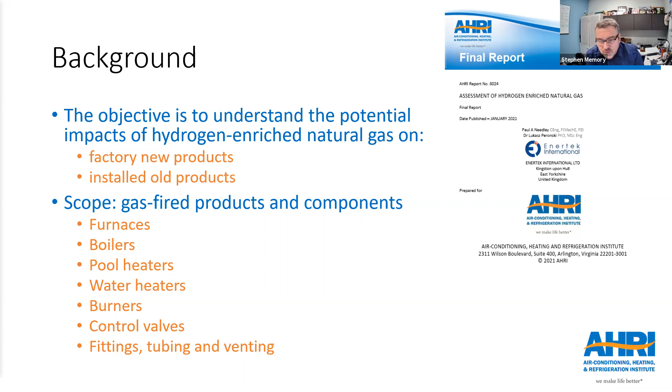I'm delighted to have this opportunity to speak about the work we've been privileged to undertake on behalf of AHRI, although in an ideal world, I'd rather have done this in person instead of via a screen. Once the COVID pandemic subsides, climate change and the need to decarbonise is likely to be the next topic to dominate the news, and hydrogen is seen worldwide as the best way to decarbonise the gas supply, either by blending it with methane or even replacing methane in the longer term.

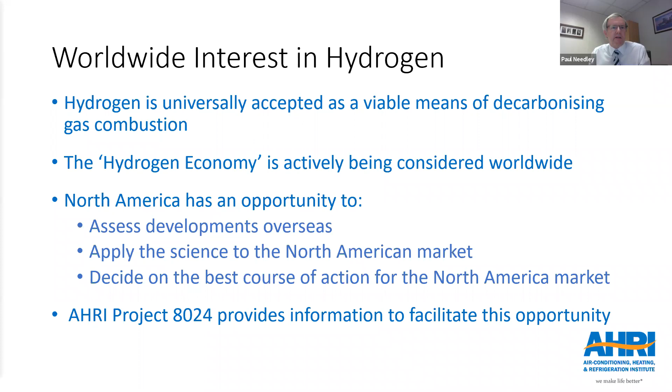Now, it's probably fair to say that Europe, and particularly the UK, is at the forefront of the drive to decarbonise, and consequently, perhaps for a change, North America can reflect upon what is happening elsewhere, take note, check the science, and apply the knowledge gained to get the best solution for the North American market. Hopefully, this project provides information to facilitate that opportunity. Next slide, please. Thank you.

So the rationale behind the project was to look at what information is currently available, to refer to the science, specifically combustion technology and thermodynamics, and apply this to typical American gas appliances so that we could identify and evaluate risks, then propose what, if any, action is required.

Thank you. Amid the news and hype about hydrogen worldwide, many of the projects underway are concerned with the production, storage and distribution of hydrogen. Whilst these are very important and essential if hydrogen is to become mainstream, we are concerned with its end use. Even then, there are questions over its best use. Should it be used for industrial applications, for power generation, or transport, rather than for heating or cooking? However, natural gas combustion produces CO2, and for the gas network to survive, it needs decarbonising, and hydrogen offers the best way to do this in volume, and of course, our project focuses on heating products.

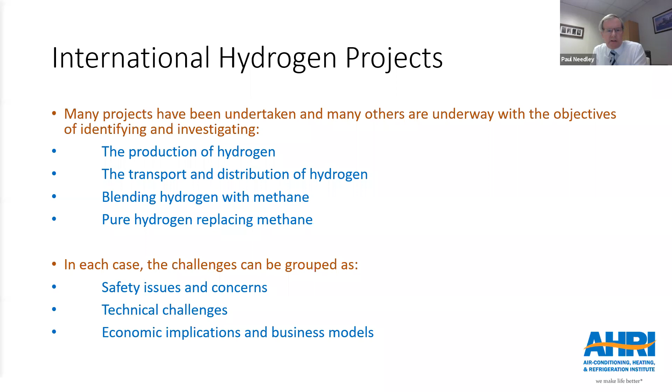Whatever the product or wider use of hydrogen, the challenges are the same. Safety issues and concerns have to be priority number one. Technical challenges need to be overcome, and there needs to be a viable business model for it to succeed. Next slide, please, Sudan. Thank you.

In June 2019, the UK government passed legislation to make net zero by 2050 a legally binding target. Decarbonisation is therefore a key policy, and hydrogen is seen as the only viable way to continue to operate a major national gas grid in the longer term. In November 2020, the Prime Minister Boris Johnson published a 10-point plan for a green industrial revolution, and his point number 2 is driving the growth of low-carbon hydrogen. Points 1, 7 and 8 are also relevant to this study: advancing offshore wind, greener buildings, and investing in carbon capture, use and storage, respectively.

Now, essentially, the Prime Minister's plan is to start blending hydrogen into the UK gas main from 2023, and at the same time have trials for 100% hydrogen heating of homes. Investment in excess wind power and carbon capture and storage to extract hydrogen from methane will produce the hydrogen to facilitate this.

HyDeploy is the UK's first practical project to demonstrate that hydrogen can safely be blended into the natural gas distribution system without requiring any changes to appliances. The site chosen was Keele University campus, which is located in the West Midlands. The objective of the HyDeploy project is principally to develop the initial evidence base that hydrogen can be blended into an operational natural gas network without disruption to customers and without prejudicing the safety of end users.

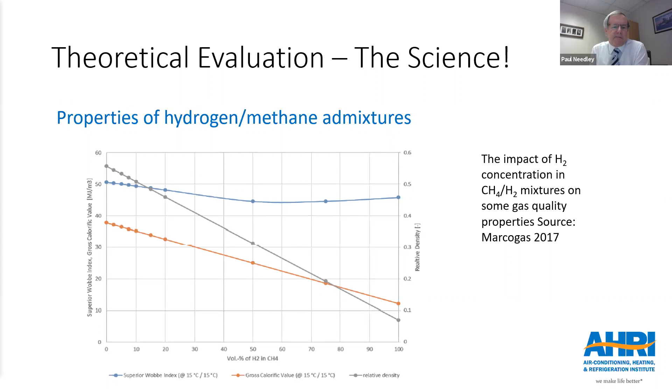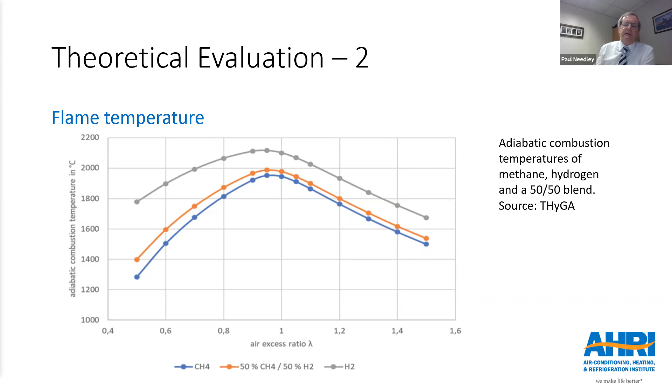Thank you. This graph from the THyGA project shows that despite pure hydrogen, the grey line, burning with a higher temperature than pure methane, the blue line, at all aeration levels, an admixture is biased towards the methane. The orange line shows a 50-50 blend, and clearly it is not halfway between the other two lines. So by deduction, a 10 or 20% blend is going to be fairly close to the combustion temperature of methane, especially at excess air levels where most gas appliances operate. Next slide, please. Thank you.

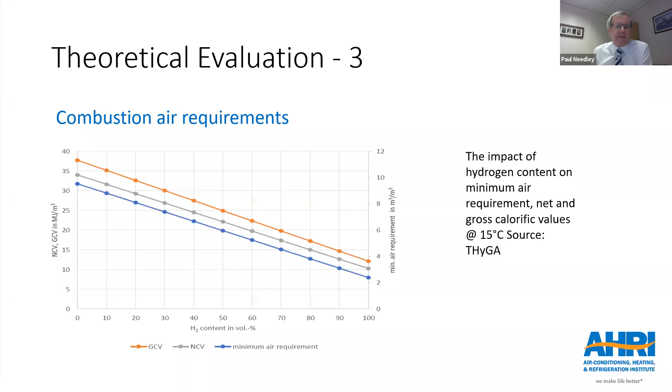Thank you. One of the key concerns with admixtures is the propensity to light back due to the flame speed of hydrogen being much higher than that of methane. Lightback is likely to happen if the flame speed is higher than the velocity at which the gas passes through the burner ports. There are other factors such as flame quenching which can prevent this, especially on premix burners, but in simple terms, burners are designed with flame ports being the correct size to support the required flame.

So if the flame speed increases, as it will with a hydrogen admixture, the flame front will move towards the burner ports. For a given burner design and heat input, the exit velocity through the ports can be calculated, providing the level of aeration and the temperature of the air-fuel mix is known.

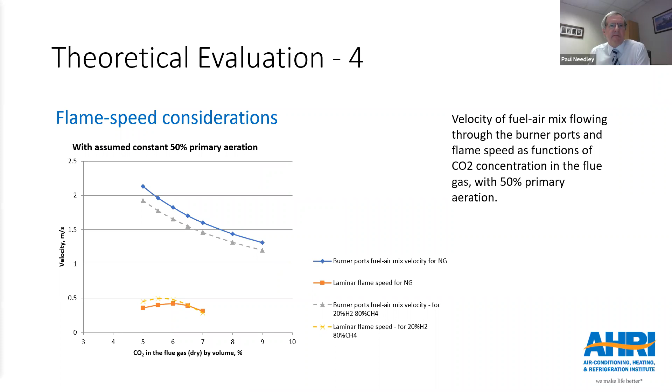Thank you. Paul, I'm sorry, Paul. I just got a message from one of the audience that said the slide does not advance. I just want to make sure it's not from our end. Can anyone from the audience just tap through chat and say if it works or not? Okay, it seems like it works for most folks. Thank you so much. Sorry, Paul, go ahead and continue. Sorry for the interruption. Okay, thank you. Right, yeah, I can see the slide here.

Okay. There's not enough time today to talk through all of the theory, but in summary, I can state that with a hydrogen admixture, depending upon the blend, flame speed is likely to increase slightly, thermal radiation will decrease slightly, thermal efficiency will decrease slightly, mainly due to the higher excess air. NOx emissions may decrease because of the higher excess air. The dew point will fall very slightly.

Flame detection using flame ionization becomes unreliable above around 30% hydrogen. Flame colour is not an issue at low blends, and soundness is slightly more difficult to maintain. Safety depends upon all other factors falling into place, especially resistance to lightback. Next slide, please, Sudong.

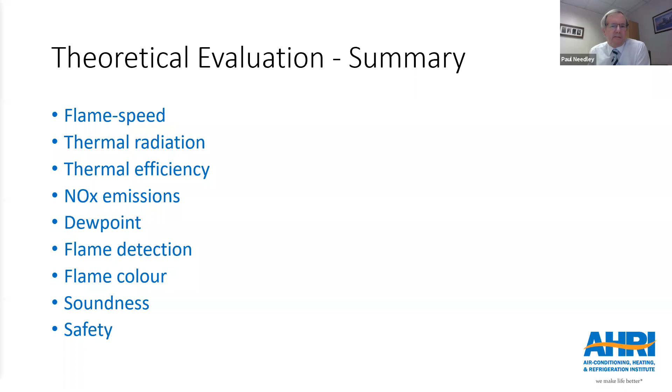Thank you. Although test work was technically outside the project brief, we took an opportunity to test a traditional American atmospheric burner with slotted ports rather than circular ports to determine the effect of a 23% hydrogen blend, which we keep in stock as a European test gas.

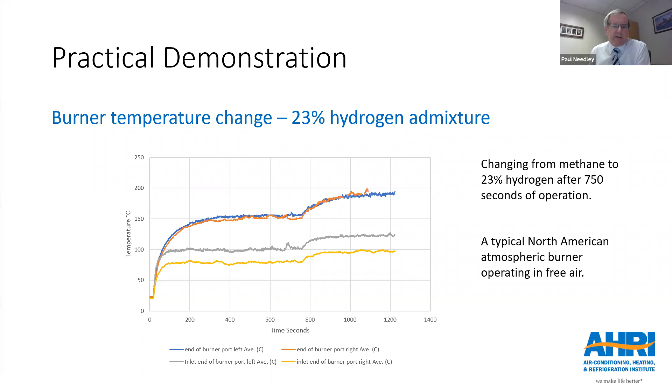Potential leakage from joints and components is because hydrogen is a smaller molecule and more likely to leak out of joints than methane is. This should be borne in mind in terms of installation. Also, when installing an appliance, it's very important that no adjustments are made, because the automatic effect of a 20% blend is a 5% down rating.

I didn't mention that earlier, but the 5% down rating that you get automatically because of the different characteristics of the gas is useful in offsetting potential temperature increases, which would occur if the appliance was adjusted to restore 100% of rating. So adjusting the appliance to compensate for the down rating may invalidate the certification, which is based on methane, because it would be overrated if it was then used on methane.

A further complication is that the installer would have no means of accurately measuring the blend of hydrogen at the time of making the adjustment, so therefore the setting would be unknown.

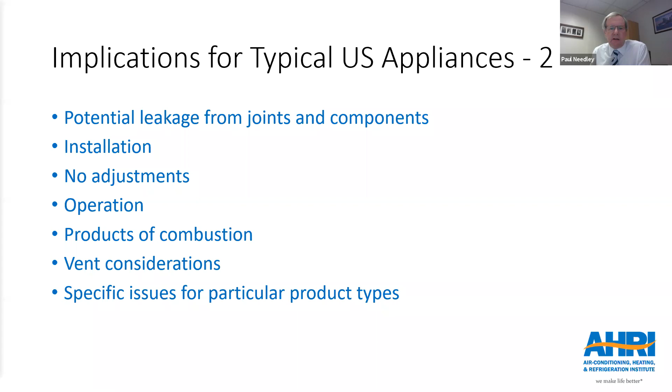Next slide, please, Sudan, thank you.

Difference between North American and European appliances. Well, obviously there's market requirements. The market requirements are slightly different, mainly based on the application and use of appliances rather than technical differences. We tend to have smaller properties, so the appliances tend to be more prominent. And boilers, for instance, are usually installed in the kitchen area rather than the utility room.

However, there is a significant difference in certification requirements, because in Europe we have specific limit gases which represent the extremes for what could be encountered in the gas network. We have G20, 100% methane, for a reference gas. And then we have three limit gases, G21, G222 and G23. They are natural gas with 13% propane, 23% hydrogen and 7.5% nitrogen respectively. The propane content is for a combustion limit gas, the nitrogen content is for a lift gas, and the hydrogen content is a light back limit gas. That means that all appliances on the European market have been tested for ignition with 23% hydrogen.

Furthermore, old British standards, before we joined the EU, used to test to a test gas called G22, which had a 35% blend of hydrogen, as opposed to the 23% blend that we use now, which means that legacy UK products are even more resistant to light back because they were tested with a higher limit gas.

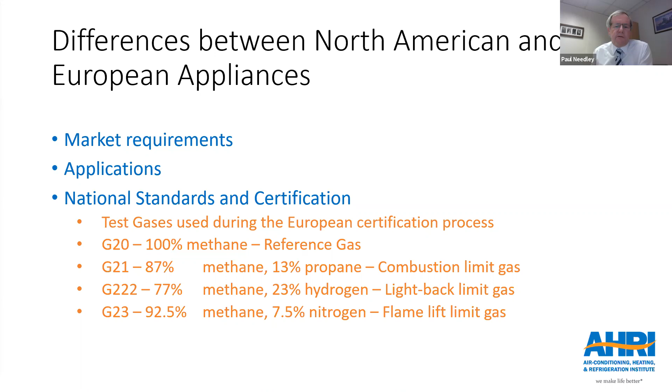Next slide, please, Sudan.

Thank you. I'm conscious of time, so I won't go through the FMEA process, fairly standard process, and the output is summarised in the report. There's a separate summary for each product type that we looked at, and there's details available in a separate file from AHRI upon request. Next slide, please, Sudan.

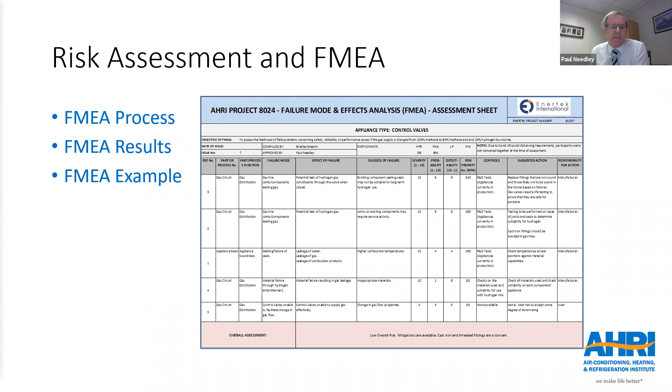Thank you. As part of the project, we've developed a light back calculator. This is based upon manufacturer data. It's available to members from AHRI upon request. And basically, if a manufacturer inputs the heat input, burner port area, CO2, and temperature inside the burner, it'll calculate the excess air factor and velocities, etc. And ultimately, it will give you a message indicating the risk of light back. There's an example shown on the screen there. I don't suppose you'll be able to read it on the slide, but it basically says whether there's a danger of light back or not for that particular appliance.

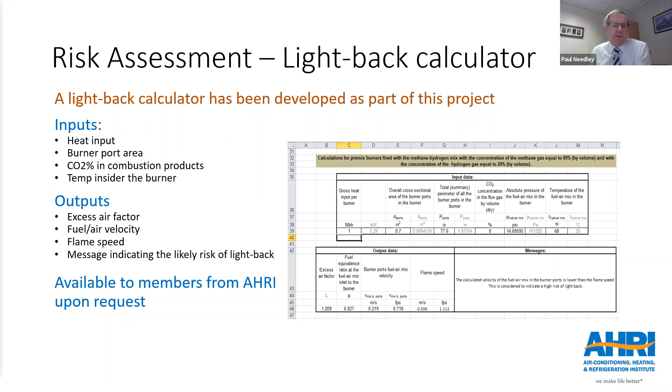Next slide, please, Sudan. Thank you. Just need to script.

So, conclusions regarding performance. A reduction in heat input of approximately 5%, an increase in combustion products dew point of approximately 2 degrees F, an increase in flame speed, reduction in radiation heat transfer, higher excess air level, likely reduction in NOx, an increase in burner temperature, and an increase in water vapour.

And the practical effect, the low heat input coupled with an increase in excess air prevents a significant increase in flame temperature and can cause a reduction in NOx. The effect on efficiency depends upon the appliance design and the relative counterbalancing of characteristics. The lower heat input marginally increases efficiency, whereas the higher excess air and low radiation marginally decrease it.

Right, next slide, please, Sudan.

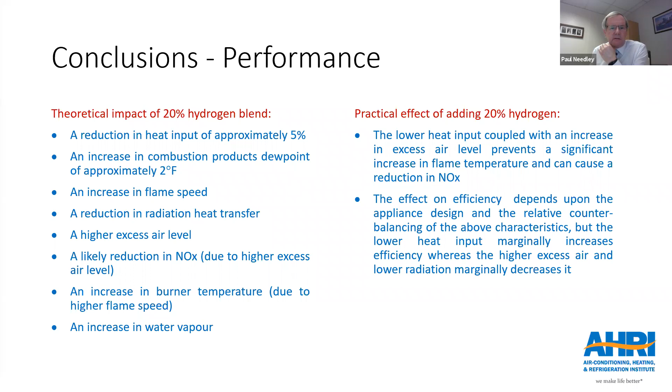So I'll just get out of step here, some notes. So if the appliance is adjusted to recover the lost 5%, the counterbalancing effect is lost. NOx, flame temperature and burner temperature all rise and efficiency is likely to fall. Long-term reliability issues are not known. Flame lightback is a concern, especially on legacy appliances.

Hydrogen embrittlement is a concern, but initial results from the THyGA project suggest it does not pose a threat to gas appliances under normal conditions. However, its components and risks need to be understood with respect to the whole gas network, not just gas appliances. And hydrogen is more volatile than methane and carries a higher risk of detonation if mishandled.

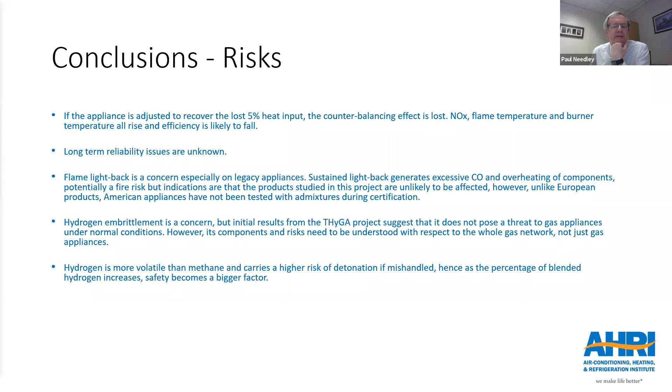I'm running short of time, so I'll move on to the next slide, please, Sudan. Thank you. So our overall conclusion is that subject to conducting further research in the key areas defined in this report, theoretical indications and initial evidence suggest that it should be safe to inject up to 20% hydrogen into the US gas main without significant risk. Next slide, please, Sudan. Thank you.

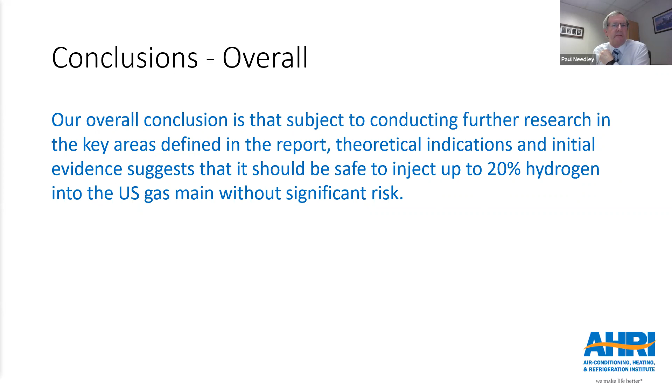So North American appliances and installations are sufficiently different to overseas products to require separate consideration and research into the long-term and reliability effects of blended gas. I think international cooperation could have mutual benefits. Legacy appliances are a concern and a policy is needed, perhaps involving an on-site risk assessment, and perhaps the lightback calculator could be used on-site for appliances that are unknown.

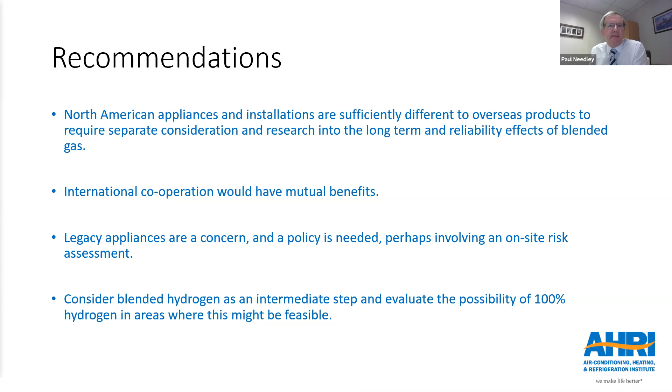Consider blended hydrogen as an intermediate step and evaluate the possibility of 100% hydrogen in areas where this might be feasible. And that takes us to the next slide, please, Sudan. 100% hydrogen. Well, the UK Hy4Heat project is demonstrating that hydrogen appliances are feasible. By mid-2021, we will have certified hydrogen gas fires, boilers, hobs, ovens, grills, furnaces and commercial catering equipment available for sale when or if a hydrogen market exists.

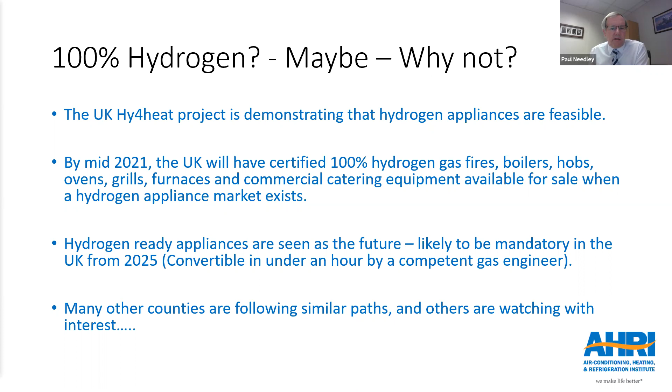Hydrogen-ready appliances are seen as the future here, likely to be mandatory in the UK from 2025. That means that they are supplied suitable for methane, but are convertible in under an hour by a competent gas engineer. So when hydrogen is installed in the local area, you don't have to replace the appliance, you simply get it converted. And many other countries are following similar paths. Next slide, please, Sudan. Thank you.

And finally, just our view. We've developed 16 different hydrogen appliances in the Hy4Heat programme, working with manufacturers in a consortium approach. Development time can be shortened with the use of modelling tools and techniques, and there's just an illustration there showing what our CFD engineer predicted before we fired the sample, and the actual flame on the left is what we achieved, which we're quite pleased with. And we haven't found a European production gas appliance that cannot be adapted to operate on 100% hydrogen.

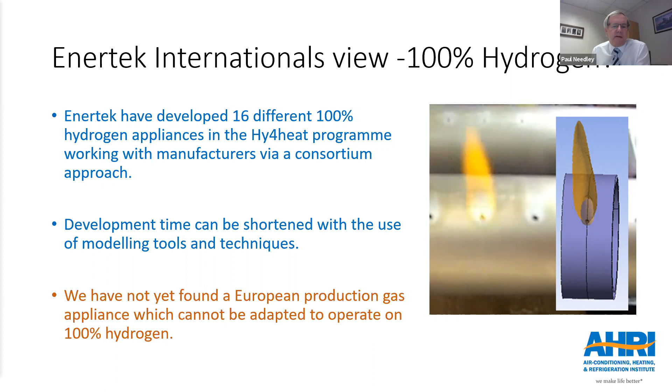Next slide, please, Sudan. And well, finally, that's just a review of the literature references. They're all in the report together with the appropriate links. So I'm sorry I've rushed through this a bit. I'm very conscious of time. I hope that gives everybody a flavour of it.

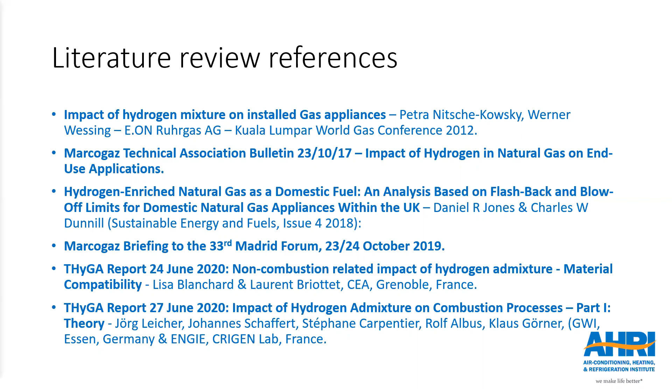And also in parallel with this theoretical analysis, AHRI has been working closely with our friends at the AGA and the CSA on an exploratory testing program. So I guess the next two speakers will talk about the testing. So Yusuf and Ted, thank you for coming, and please let us know what we have jointly tested and what results we actually found. So yeah, thank you.

Great, thank you, Judong. Appreciate the time today and appreciate the opportunity to present to the group. As mentioned before, I'm Program Manager for the Fuels and Appliances Standards Program here at CSA Group, and Ted Williams, Senior Director at AGA, is going to join me today to help present the results. Next slide, please.

So through the presentation, we'll touch on a few things: an overview of CSA Group standards and our research program. We will cover the hydrogen-enriched natural gas research project, including the origin and objective of the project, the research project plan, and deliver some of the preliminary summary of results. And then we will conclude with some next steps and future work that CSA has been coordinating with industry stakeholders.

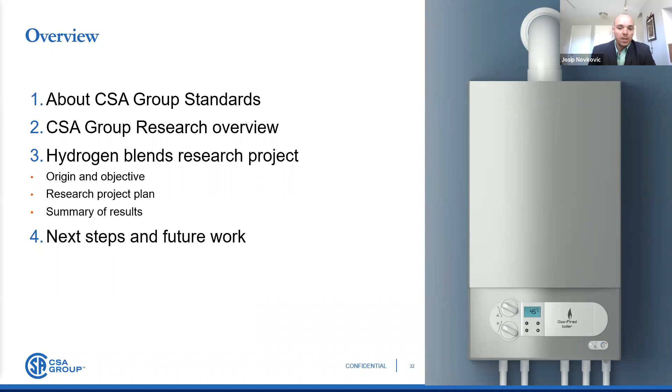At CSA, we take a comprehensive approach to standards development. We engage in leading edge research to help inform standards content and the committees we work with, while also providing training and education on products to ensure standards are used correctly, and to help ensure comprehension and application of the standards we publish.

This presentation will focus on a research project intended to provide data and inform future standards development activities around the topic of hydrogen-enriched natural gases.

At CSA Group, we believe in keeping pace and even getting ahead of change, and that relies heavily on a research program. We've dedicated considerable efforts over the years to conducting and supporting research focused on new and emerging areas, supporting future standards and codes development, providing interim guidance to industries on adoption of new technologies, and demonstrating our ongoing commitment to social good.

Turning to the details of the research project, this was co-funded by the Air Conditioning, Heating, and Refrigeration Institute, American Gas Association, and CSA Group. Appliances were donated by AHRI members as an in-kind contribution.

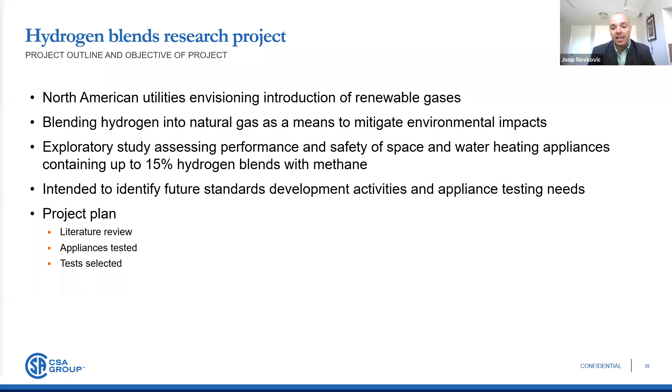At the onset of the project, a project advisory panel was formed, consisting of the co-funders and AHRI members, to support establishing the project plan and scope. The project plan was broken down into three main phases: a literature review, selection of the appliances, and selected tests from the applicable CSA and ANSI standards.

The literature review was the first step, meant to identify how the vendor was going to approach the concept of hydrogen-enriched natural gases. As many of you probably know, design and performance of residential appliances are dictated by combustion energy output and fuel gases, currently including conventional natural gases and their variants.

Compared to natural gas, hydrogen has a lower specific gravity and lower heating value by volume, which results in a lower Wobbe index for hydrogen-enriched natural gas than that of natural gas. Although the Wobbe index is considered the best single parameter measure of gas interchangeability, a simple comparison of the Wobbe number was not a reliable predictor of hydrogen-enriched natural gas use in residential appliances, for three main reasons.

The Wobbe number of hydrogen-enriched natural gas changes nonlinearly with hydrogen content. The Wobbe index cannot completely predict gas interchangeability as it does not account for all combustion phenomena. And the Wobbe index and higher heating value generally refer to burner performance, but not appliance operation.

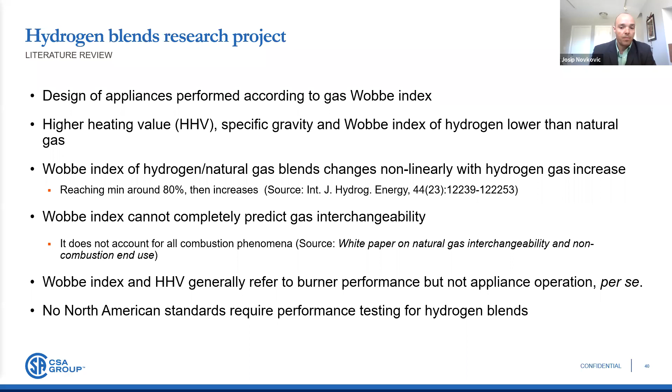The focus of the project was on space heating and water heating appliances, which included: 4 units of residential warm air furnaces, 4 units of boilers, 2 units of water heaters, and 2 space heaters.

Towards the end of the project, we received a proposal where we included household piping. The household piping materials supplied and provided for testing were black iron steel pipe, press connect copper, flare connect copper, and corrugated stainless steel tubing.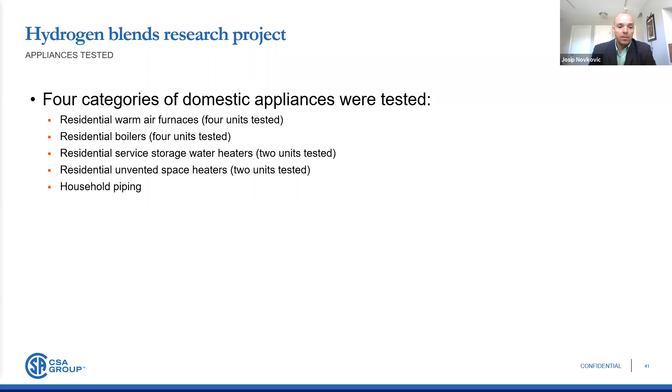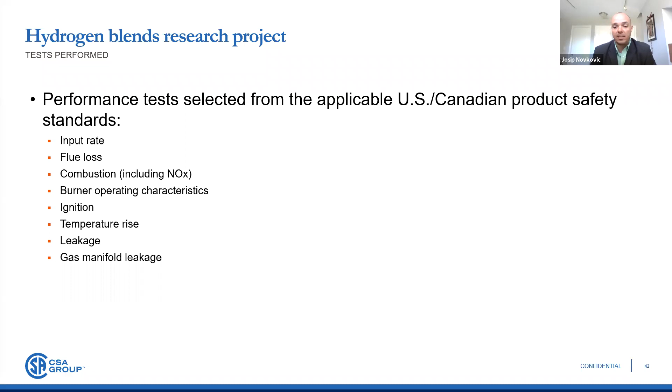Similar to the products selected, tests were also chosen based on discussions with the project advisory panel and the vendor. Given the limitations in choosing products, only a select set of tests were chosen, based on the products selected and what initial results would be most impactful for future studies. They were performed through the methods outlined in the binational CSA ANSI Z21.1 series of standards.

Next, Ted will provide an overview of the results of the testing. Ted, over to you. Sure, thanks, Josip.

Just a couple comments before we get into the summary of results. Keep in mind we've got two presentations today, one mainly on theoretical considerations and some experience from overseas, and then the testing we're talking about here. There really hasn't been any attempt to coordinate our presentations. You may find consistency in some of our findings with the theoretical predictions that Paul described, which I think is very important, and some additional field or testing results that are similar as well. But there are other issues that need to be discussed and more completely vetted as we move forward and talk to each other.

I think we need to understand that this is exploratory, and we went into testing without any real hypothesis to be tested, but instead made sure we applied what we thought were relevant tests out of the safety standards that CSA Group maintains for North America, both Canada and the US, looking at the performance requirements as appliances are currently tested under those standards. So it's not the be-all and end-all for evaluating appliances operating on hydrogen, but it is a starting point for looking at how appliances might respond under certification testing to hydrogen.

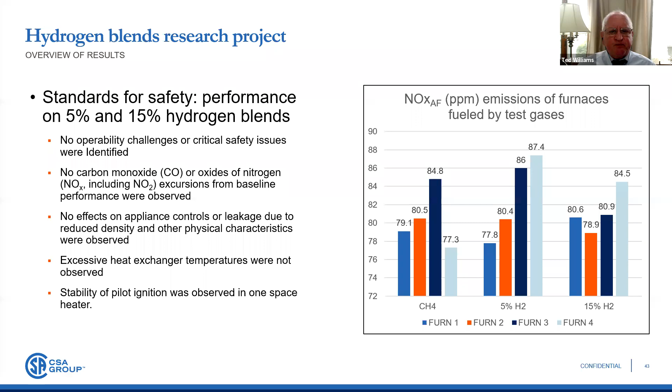But despite the differences in the reduction, results were consistent with those predictions, and the influence was seen in both furnaces and boilers we tested - modulating, in stage, two-stage appliances - but these were tested at full rate. So we really didn't evaluate the modulation performance under these different test gases. Everything was done at its full nameplate rate.

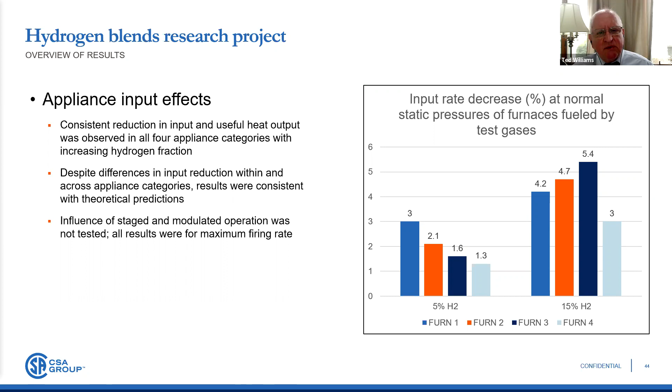Next slide, please. In terms of the carbon footprint, which is everybody's looking for, there was another general observation. We did see, across the appliances, reduced CO2 emissions, as one would expect, roughly proportional to the percentage of hydrogen introduced in the appliance, so fully consistent with the theoretical prediction.

But in terms of air-free carbon monoxide, we saw stable air-free CO despite reductions in CO2 emissions. So you have to consider how the CO - I think there's some expectation the CO might actually go up on an air-free basis, but we did not see that. We didn't see a problem with CO as CO2 is reduced.

But in the case of reduced input, I think the simplest point Paul dealt with was that, because of the reduced inputs, in order to serve the heat demand of the space - in case of space heating, or water heating in terms of hot water requirements - longer operating periods or firing durations were required for the same useful heat output. Now, we did not test for that.

I think that's a fairly obvious implication of this, but in the case of appliances, you get a little less in terms of CO2 reductions, and that's really described in the fourth point - you do have to increase your firing of fuel gas to achieve the same useful output. This is neglecting Paul's implication about some change in efficiency. Even if you hold efficiency constant, you'll see that you'll have to increase firing rate over time, and your CO2 reduction on net will be somewhat less than what might be predicted by a simple comparison of the constituents of fuel gas, namely the reduction in methane.

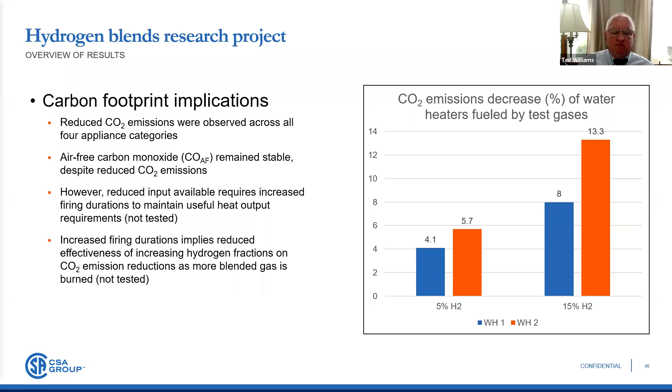In terms of the supply implications, the pure methane and hydrogen may not be representative of field performance for that very reason, that we're dealing in the U.S. with a highly variable supply gas situation in terms of other alkanes, other heavier hydrocarbons, and also presence of inerts in the gases that may affect certainly methane number of the gas and Wobbe number as well. So essentially the conclusions are really applicable to pure methane and pure methane-hydrogen mixtures.

But as far as additional testing, this issue of actual test gas, also actual delivered gas, is an issue, particularly in North America. And also there's this suggestion out of the white paper that was described earlier, that the standard interchangeability criteria of higher heating value limits may have some limitations in terms of their applicability as we get to higher and higher percentages of hydrogen blends.

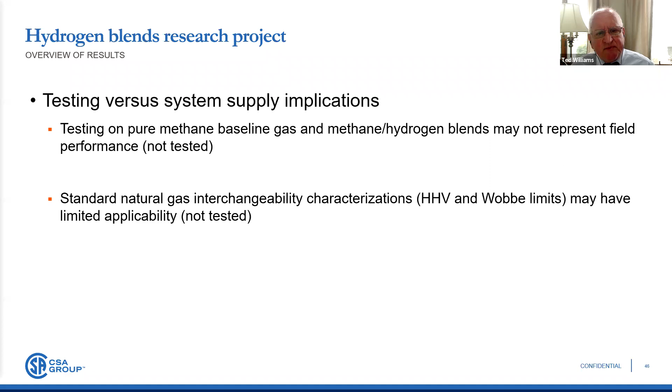In terms of the gas piping testing, again, this is done by looking at pressure decline over time, and then another test looking at essentially bubbles in the water bath. We didn't find any leakage when looking at black steel with unions or corrugated stainless steel or copper. There's going to be follow-on to this, but certainly in that simple test for what piping and tubing within the appliances might do, we didn't see any evidence of problems. And so the pressure decay is the second bullet point. Next slide, please.

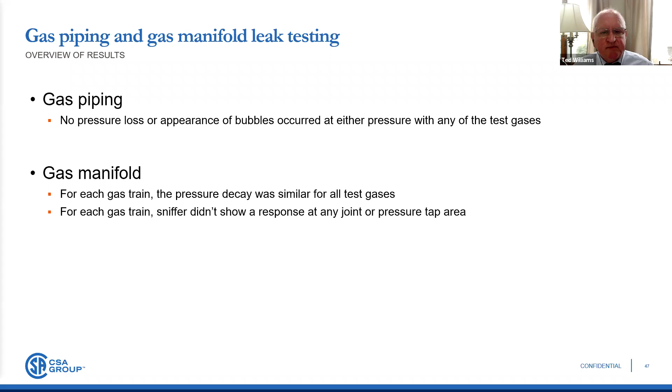Okay, I turn that back over to Josip to wind up the summary of this testing program. Josip? Thanks, Ted. Appreciate that.

So as we continue to talk about, there were really no conclusive results based on this research, but there is an abundance of interest to continue assessing safety and performance of the decarbonization strategy across the industry. It's expected that the technical committees that received the results back in December continue to assess that data to determine the path forward, but we will also be publishing the CSA Group public report this spring. A special thanks to Ted for supporting the development of that report and working with CSA Group staff on pulling all the necessary pieces together.

As the testing of this exploratory program was winding down, we received a proposal from an industry stakeholder looking at expanding on this initial step to introduce hydrogen blends up to 50% or more, include a broader scope of products, and potentially also include in-service and used legacy appliances. At this point, CSA is attempting to form a project advisory panel of various stakeholders to help develop the scope, prioritize the testing and establish a total cost. We welcome others interested in furthering this important work to reach out to me if you have any interest.

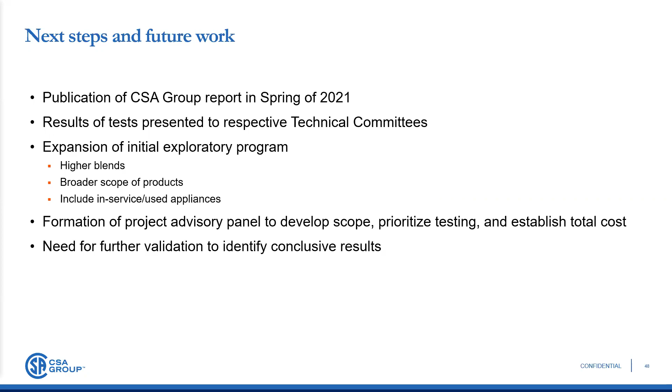Ted, your organization represents many energy companies that deliver natural gas throughout the country. Would you spend a few minutes to talk about AGA's current activities and plans on this subject? Absolutely, I'd be glad to. Thanks. As background, AGA represents over 200 local distribution companies across the U.S. We also coordinate heavily with the Canadian Gas Association, which serves the same function for Canadian utilities, and we do have some activity on hydrogen with them.

In terms of where we would like to go with this, our initial proposal for the exploratory program was just to get into this, since we didn't see a lot happening in the U.S. with respect to appliance activity related to adding hydrogen to fuel gas. So we wanted to be sure we worked with industry and insisted on AHRI being involved, because we're not going to do anything without manufacturers' involvement, either from the standpoint of appliance design or certification. As gas suppliers, it's incumbent on us to have that sort of interaction.

Just go through a couple points in terms of where we think we're going. This issue I raised earlier about essentially real natural gases as part of natural gas hydrogen blends becomes important, and particularly looking at combustion behavior as it changes when you add the heavier hydrocarbons and inerts to those blends, because certainly the physical properties of those gases will change, and we're looking more at things like methane number as a metric, and that's used in Europe as a basis for EU exchange of gas cross border. And so it's something we need to look at as well.

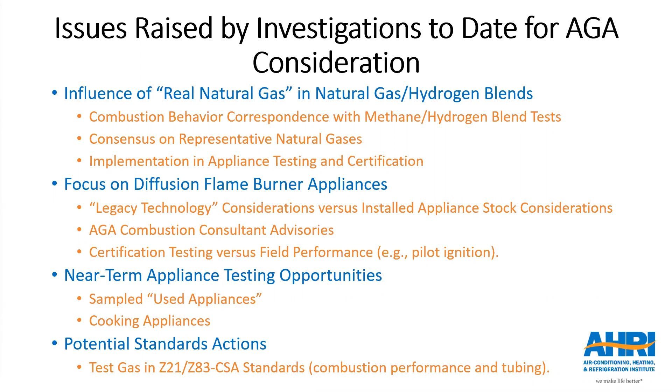Paul, are you on mute? Yes, hello. Sorry, I'm back. I was trying to answer a few of the questions. Yeah. So can you just repeat what you?

Yeah, the question: the purpose of using hydrogen blended fuel, because generating hydrogen would consume power, consume energy and generate emissions. What's the overall environmental impact? Does Europe have any study?

Well, yeah, in the UK, we're obviously surrounded by quite a lot of water, quite a lot of wind turbines, which produce electricity when it's windy, whether you need it or not. So the proposal is when it's in summer, when there's not a high demand for electricity, any surplus wind energy, instead of turning the turbines off, which they have to do now because they can't store the electricity generated, the idea is we'd turn it into hydrogen and simply store it in appropriate places to be used as and when.

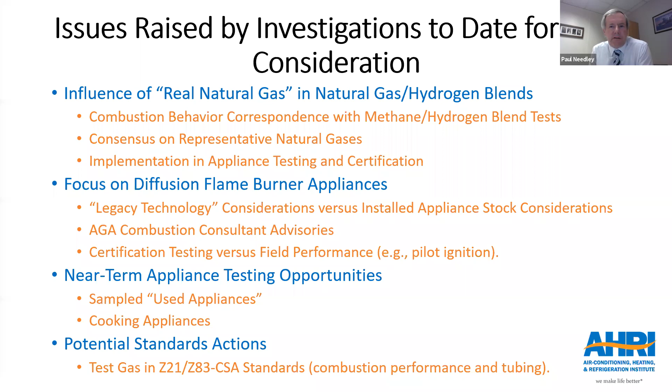The alternative, of course, is using carbon capture and storage and methane steam reformers to extract the hydrogen from the methane and pump the CO2 back under the North Sea, because there's huge empty gas fields that we spent the last 30 years emptying of methane that we could now fill up with CO2. So the pure objective is to reduce CO2. They need the most economical way of doing it.

And one of the questions I haven't got around to answering is about decarbonisation. Yes, mixing 20% hydrogen doesn't give a 20% decarbonisation, of course. It only actually reduces CO2 by about 6%. But 6% of quite a lot is still quite a lot. And the proposal over here certainly is that the idea of blending is to build up hydrogen capacity, manufacturing capacity, that at some future point it can be switched over.

So at the moment, they couldn't just start a hydrogen network. They haven't got enough hydrogen. But if they build up the capacity by blending it into the gas main, then at some point they'll take the blending out and convert maybe Leeds as a first city. And then gradually, as the hydrogen builds up, they'll convert other cities. That's the plan. Yeah, Paul, thank you.

I apologize for throwing that at you. I thought maybe, given the European and the UK experience, that you might have a little more than we have in the US. But anyway, it's sort of a dirty trick to throw that in your lap, so I apologize.